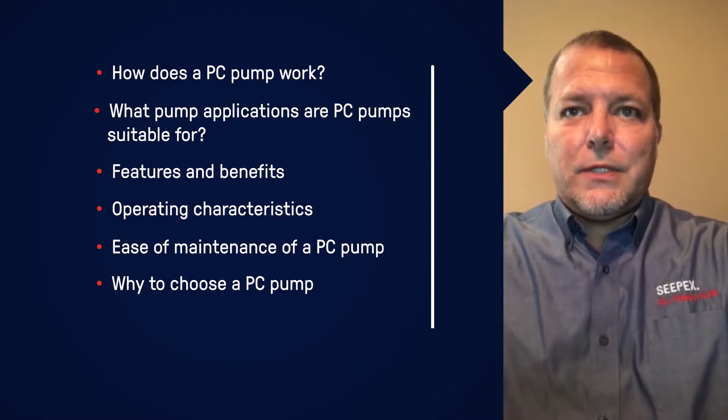Hello, my name is Chris Brooks. I'm a territory sales manager for Seepex. I cover Georgia, Florida, Tennessee, North and South Carolina for the company. I've been associated with Seepex now for about 19 years, primarily in the sales role. I've got about 30 years experience in the pump industry overall.

Today we're going to talk about progressive cavity pumps, or commonly referred to as PC pumps. A lot of good features and benefits from using a PC pump. And so we're going to talk about how they work, some of the applications you may see in water and wastewater, and then just some of the individual components and benefits.

So what is a PC pump? How does it work? So it's a positive displacement pump. It actually is comprised of a pumping element that has two main components, a rotor and a stator. The rotor is the rotating portion of the pumping element. It's typically made out of a steel or a metal material. The stator is actually an elastomer. It's the stationary portion. It's made from elastomer, typically like a Buna or EPDM or Viton.

Those two components go together. They actually form a cavity, and as the pump rotates, the cavity spirals from one end of the pumping element to the other. So you can say that cavity forms. As the pump rotates, it spirals. It actually progresses down the length of the pumping element, which is why it's called a progressive cavity pump.

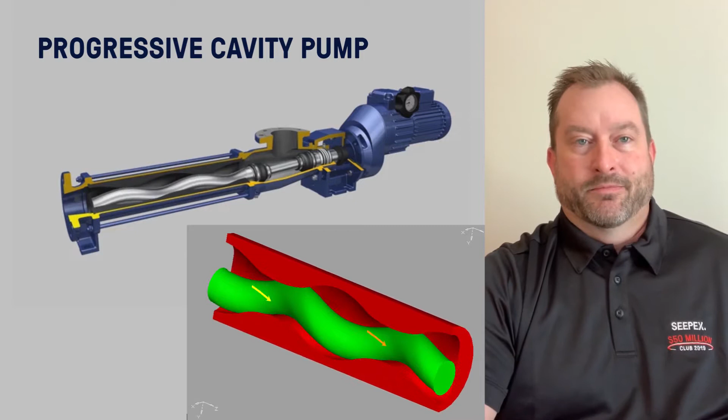Really, why are PC pumps used, or where are they used in water and wastewater? The two primary areas are chemical addition or chemical metering, and then sludge handling. There's not a lot of pumps available in the market today that can handle a wide range of products like that. So you can consider we do a lot of polymers, sodium hypochlorite or bleach, sodium hydroxide, caustic soda.

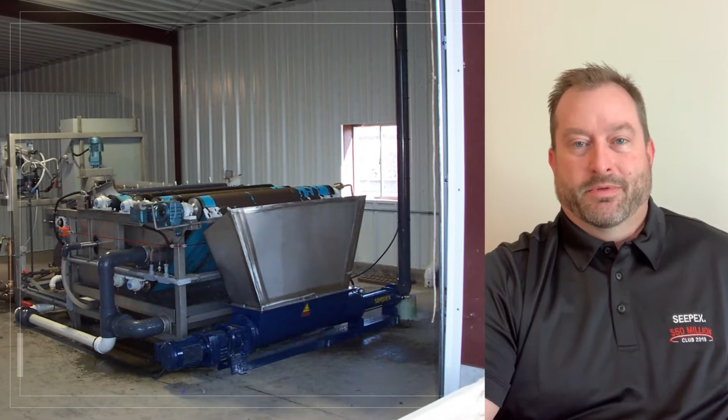So we do a lot of these thin metering chemicals, and then we also turn around and we do dewatered sludges, cake coming off a belt press that could be 45% dry solid. So it's a pretty unique pump, and it can handle such a wide range of material like that.

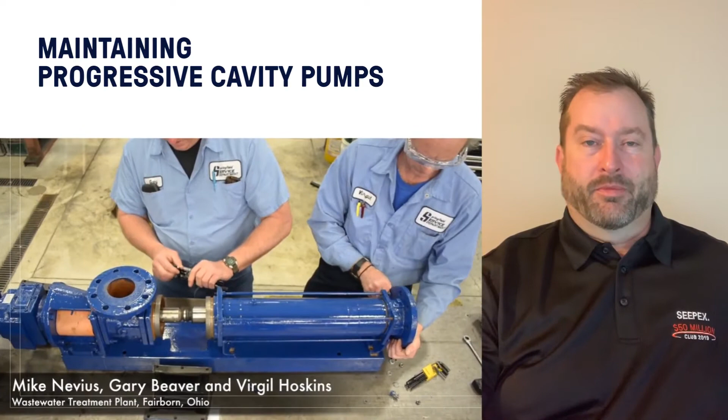Okay, the next area we want to talk about is maintaining progressive cavity pumps. A lot of people want to know, are these pumps difficult to repair in the field? They can be. Some of the larger pumps have extremely long stators, so they can be pretty heavy. Also, you have to allow for enough room on the discharge side of the pump to remove that stator off the end of the rotor.

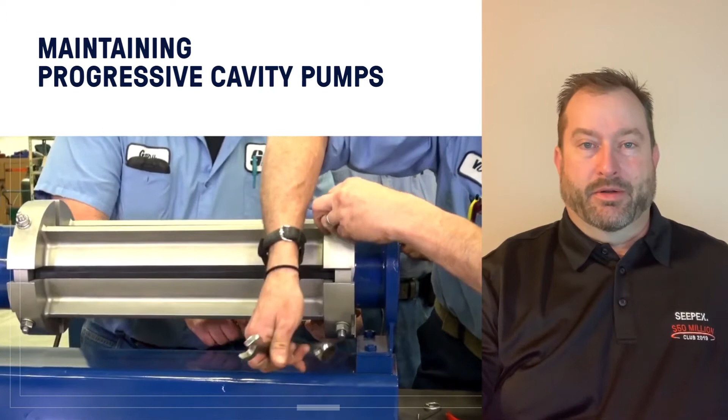Many PC pump manufacturers now have a type of maintain in place component to their pumps. And this means you can actually go in, change the stator, sometimes the rotor or other components, without having to remove any piping whatsoever. That seems to be pretty common among most of the major manufacturers now.

The maintain in place actually speeds up the maintenance time. So to change the stator, the times to do that are greatly reduced compared to a conventional stator. Because you don't have to remove any piping and have a spool piece on the discharge, the floor space requirement's much less with the maintain in place designs.

Some of the designs also include an adjustment on the fly. So basically you could go back, retension the compression between the rotor and stator as the stator begins to wear. So instead of having to run until you see a performance drop off, change the stator, you actually, when you see that performance change, go in and retension that compression and the pump's back to like new condition.

What are the benefits of using a progressive cavity pump? Why would you use it instead of other technologies? One of the main concepts is the compression or the interference fit between the rotor and stator. This limits the slip or the product going from discharge, the high pressure side, back to suction. So it's a very efficient design. It actually is very repeatable and accurate.

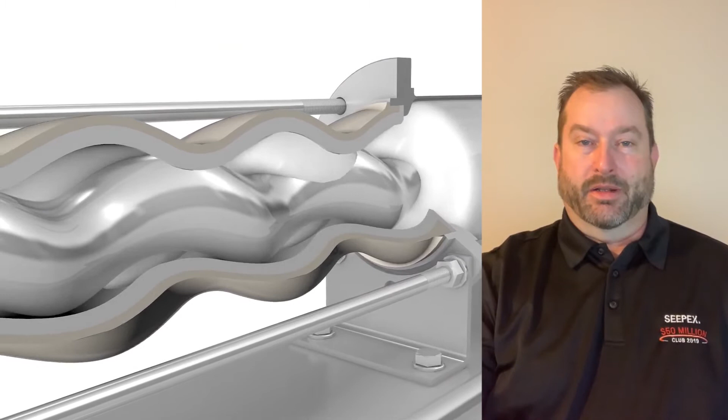So we trap that liquid in the cavity, and once that cavity is full, we know what that volume is. So as the pump rotates, we're going to get a known volume per revolution. So by doing that, we can be very accurate in metering. We can also just by changing the speed of the pump, change the flow rate, even at very low increments.

The PC pump is also a very low shear device. It doesn't put a lot of shear into the product, so liquids like polymer are very easily handled by a PC pump. Also, if you had a product that had solids that were brittle and you didn't want to break up, like yogurt with berries, for example, you could actually pump that without doing any damage to the berries. The pump can handle large solids. Some of the designs can handle solids as large as 4-inch.

The pump can be self-priming. So if you had a below grade tank and you needed to pull liquid from below ground up into the pump, you could do that with a progressive cavity pump. They have very low net positive suction head requirements. So if you had a tank that had a very low level or a long section of suction line, you can actually use these pumps in those applications.

We do single and multi-stage, so you can actually get very high pressures out of these pumps. They can also operate on very thin liquids as well as very high viscosity liquids. We pump everything from water or alcohol, which is very thin, up to dewatered sludge cake.

Pumps can also operate in either direction. So the normal suction is coming in at a 90-degree angle to the pump. The discharge is out the end. We can actually reverse rotation to where the suction is coming in the straight component. A lot of times if we're pulling a suction lift, we will actually run the pump in that direction so the seal or packing is not in the suction casing. We can pull higher lifts in that configuration.

So what are the typical operating parameters on the progressive cavity pump? The pumps have the ability to go from extremely low flow rates, like for metering or dosing small amounts of chemical, down into the fraction of a gallon an hour range, all the way up over 2,000 gallons per minute. These pumps are commonly used on metering, where it's literally drops of fluid, and all the way up to large flow rates, up into the thousands of gallons a minute range.

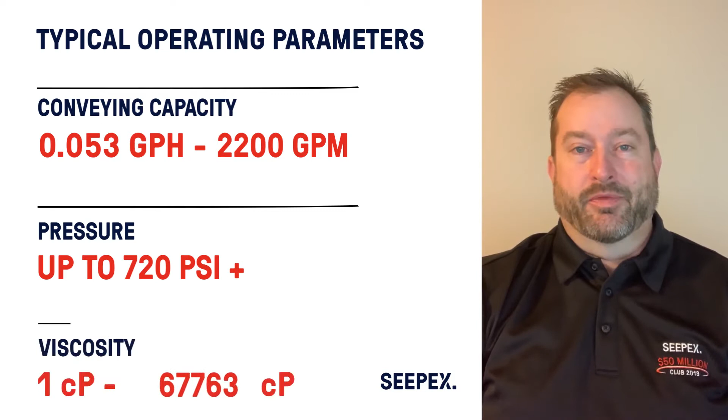The pumps can also operate in a wide range of pressures, anywhere from 1 psi all the way up to over 700 psi. Viscosities, we can handle any kind of fluids from alcohol, water-like fluids, all the way up to dewatered sludge cakes, which can be over 1 million centipoise.

The pump has the ability to operate in low temperatures down to like -4 degrees Fahrenheit, all the way up to about 350 degrees Fahrenheit. Our limitations on the temperature are the elastomers we use in the stator. Solids, these pumps have the ability to handle extremely large solids.

We handle a lot of fluids that have a large percentage of solids but are very small, all the way up to products that have large, in some cases over 3 to 4 inch size solids. The pump can also handle a mixture of air or gas and liquid as well as solids. So they're pretty unique in that they can handle not just liquid, but a mixture of those as well. We can also handle a large percentage of solids, all the way up to about 45% dry solids, which is like a dewatered cake in the wastewater industry.

So what kind of flexibility do we have on the installation of these pumps? As we mentioned earlier, the pump can be rotated in either direction. So you can actually change the position of the suction and discharge on the pump if required. A lot of the pumps use a direct coupled method, so there's no belts, no couplings between the motor, gearbox, and pump. That eliminates any kind of alignment issues.

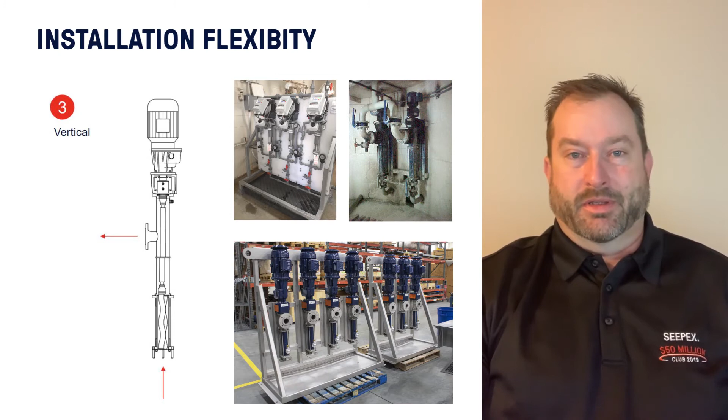The pump really doesn't care which position it's mounted in. It's pretty common for PC pump manufacturers to mount these pumps horizontally as a standard, but you also see a lot of these pumps mounted in the vertical configuration as well. On most pumps, the suction flange is at a 90-degree angle to the pump. That can typically be rotated in 90-degree increments, so that position can be changed as well. So again, the pumps are self-priming, so a lot of times you'll see these pumps pulling a high suction lift.

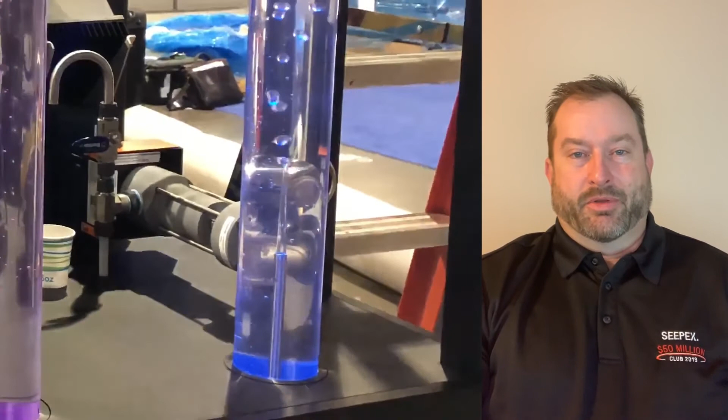Another application these pumps are used for is metering. They're very low pulsation and very accurate. So when using these pumps on metering, you can actually eliminate the need for a pulsation dampener like a lot of the other competitors need on metering. The pump doesn't use any kind of check valves. It actually acts as a valve itself, since there is a compression between the rotor and stator. As the cavity between the rotor and stator progresses out the length of the pump, as one cavity stops, another one's forming. And so it's almost an uninterrupted flow, so you see very minimal pulsations.

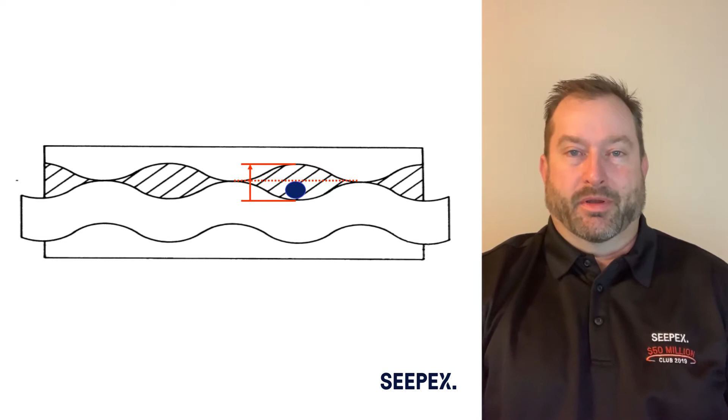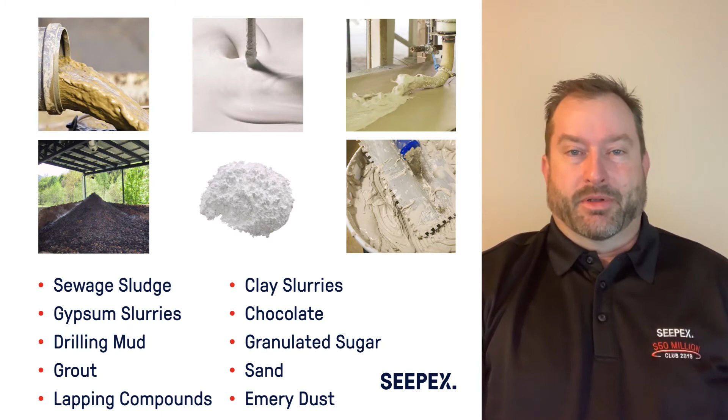Again, the pump can handle large solids, as we mentioned, as high as 4 inches on some of the larger pumps. And because of the way the cavity is formed, when those solids are trapped in the cavity, you see very little damage from the pump. The pumps are used quite often on abrasive fluids. We pump everything from calcium carbonate slurry to lime slurry, products that have quite a bit of solids in them. There are no restrictions once the product gets into the cavity. A lot of pumps have a check valve or some other restrictive device in the pump. The PC pump doesn't have anything. Once the product enters, the cavity stays the same shape from suction to discharge.

We do limit speed when we're handling abrasive solids, just to try to prolong the life of the rotor and stator. Another method to reduce the abrasive wear on the pump is to try to limit the slip. So a lot of times we'll do that by either reducing the discharge pressure on the pump or adding stages to the pump so we reduce that slip.

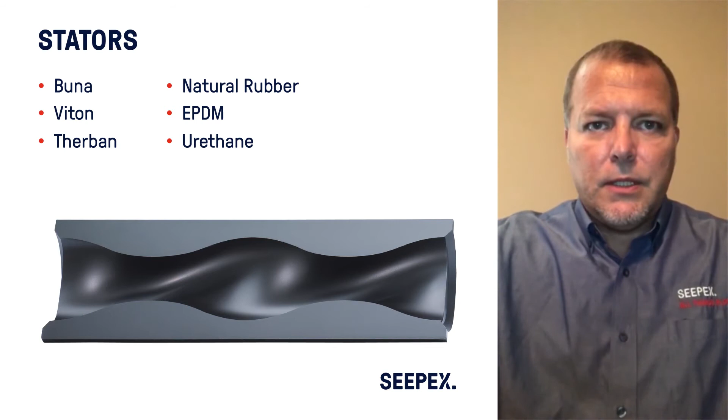Thank you, Chris. Not all stators and rotors are created equal. Let's take a look at stators first. Oftentimes, I've had to rely on our in-house lab to create new stator compounds. The stator is the sacrificial part of a PC pump, generally wearing out 2 to 3 stators to every rotor. Buna, Viton, Therban, natural rubber, EPDM, and urethane are some of the compounds that you'll find with PC pump companies. The reason for so many compounds is that there are a variety of operating conditions that can impact the stator, so selection is absolutely critical for success.

Chemistry. Aggressive chemicals can cause an improperly selected elastomer to swell, shrink, harden, or disintegrate entirely. When dealing with aggressive chemistry, be careful to select a compatible elastomer. Temperature. High temperature will cause swelling and failure of the elastomer, stalling of the pump, or damage to electric motors from the increase in compression resulting in high torque. For high temperature conditions, consider an even wall or even a split elastomer design that can allow for expansion. Some PC pump companies have special certifications such as FDA, 3A, even NSF for drinking water. Ask your PC pump company for options.

Next, I'd like to introduce my colleague Chris Oakes, who would like to explain more about the characteristics of the progressing cavity pump. Chris?

Hello, my name is Chris Oakes. I am the Applications Engineering Manager at Seepex and have been with the company for 7 years. The municipal market has been my primary focus during my time with the company, but I've also been involved in various other industries including food, oil and gas, mining, and general industrial applications.

We would like to share some information with you regarding how a PC pump works, specifically the topics of slip and intake efficiency. From there, we'll move on to discuss drivetrain components and power transmission in a PC pump. So what is slip? Slip is the reverse flow of fluid in a pump and is caused by three main factors: discharge pressure, fluid viscosity, and fit.

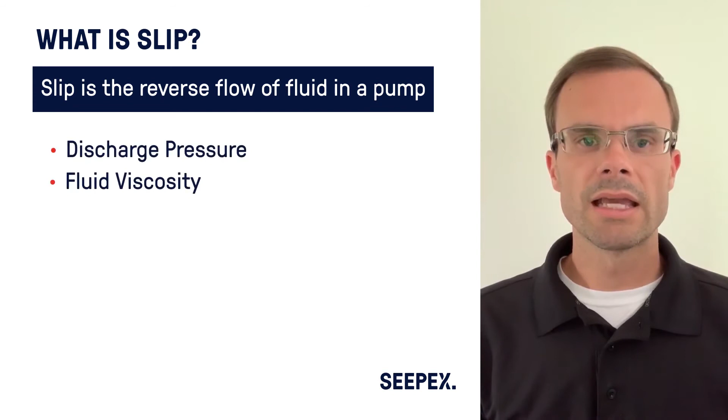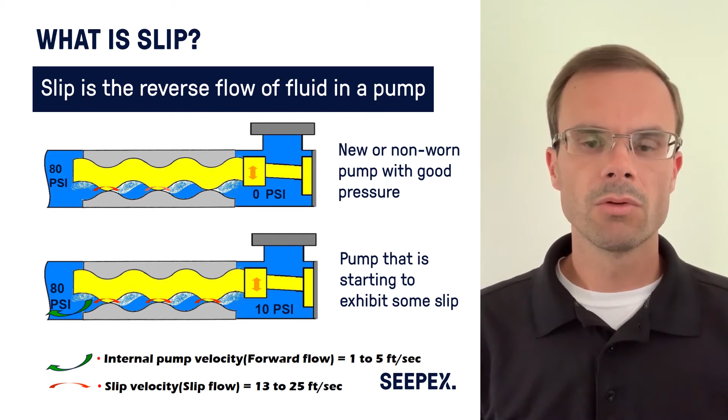So as discharge or differential pressure in a PC pump increases, slip also increases. As fluid viscosity increases, slip decreases. And as fit or compression between the rotor and stator is reduced due to wear, slip also increases. From the factory, the amount of compression between the rotor and stator has been optimized. So regardless of the source of slip, we must overcome slip to have positive flow.

Slip can be detrimental for a couple of reasons. First, slip can cause accelerated wear to the rotor and stator for abrasive fluids. Second, slip actually shears the fluid, which could cause damage to the product. So how do we reduce, eliminate, or compensate for slip? Well, first and foremost, a proper pump selection is key. Our goal is to optimize the pump and its components to meet the application requirements.

It should be noted that slip is typically not an all or nothing situation. Some slip is okay in most situations. The most basic way to compensate for slip is to increase pump speed. By increasing pump speed, we overcome the slip and achieve the desired flow. This is actually the case for most pumps that we sell, and is completely acceptable.

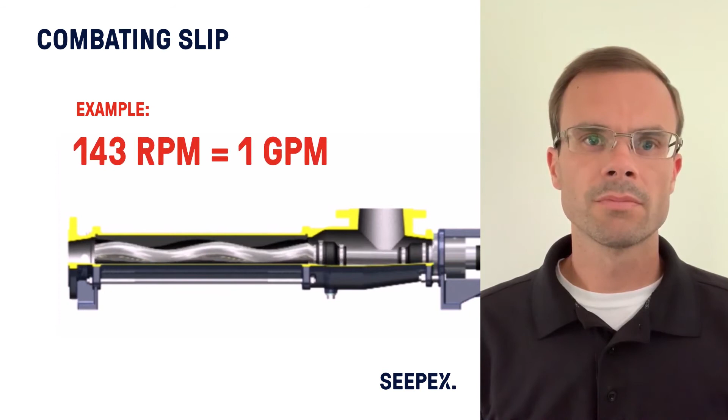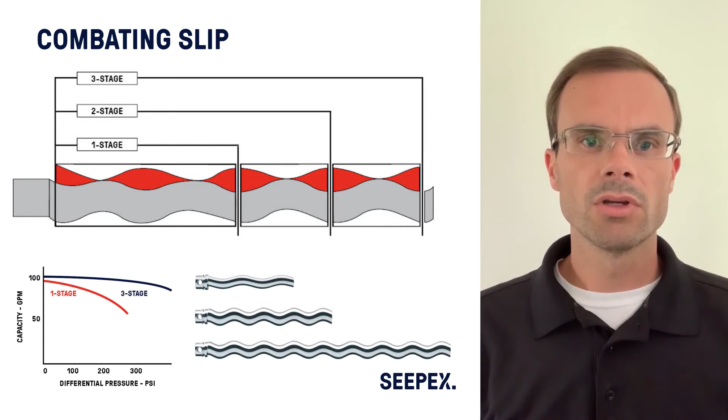In situations where we want to reduce the amount of slip in the pump, we often add stages. For example, a single stage pump is rated for 6 bar or approximately 90 psi. If our application requires 80 psi, the single stage is capable, but there may be more slip than desired. So by using a 2, 3, or even a 4-stage pump for this application, we can reduce and nearly eliminate the slip. Eliminating slip and adding these stages will also extend the service life of the pump.

Another method for controlling slip is to adjust the compression fit between the rotor and stator. This is less common, but it is advantageous in some situations. Reducing slip allows tighter control for metering and dosing applications.

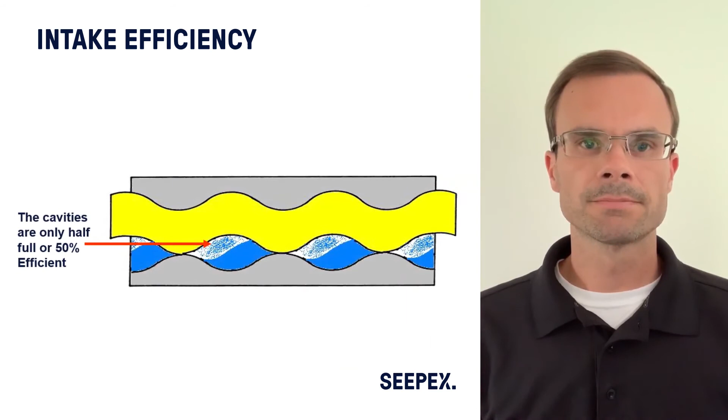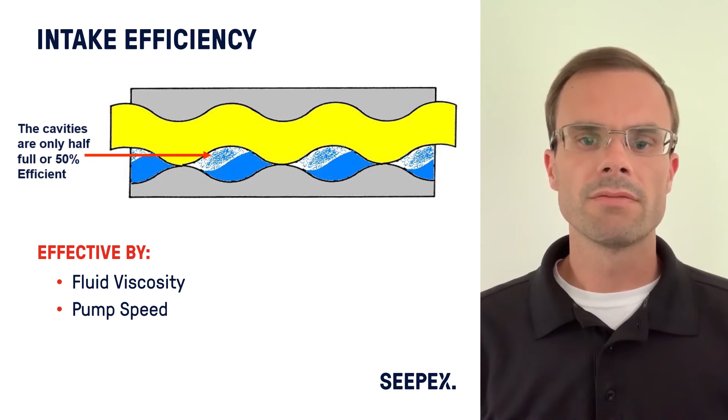So we should now discuss intake efficiency, sometimes referred to as volumetric efficiency. This is simply a measure of how well the product flows into the pump and fills the cavities. Intake efficiency is affected by fluid viscosity and the pump speed. The thicker the product, the more difficult it is for the product to flow into the pump. Likewise, the faster the pump runs, the lower the intake efficiency.

So previously we mentioned that higher viscosity reduces slip. So there's a balance between reducing or eliminating slip and having high enough intake efficiency to actually convey the product. The first method of increasing intake efficiency is to run the pump slower. This means a pump for something like peanut butter will be larger and run slower than a pump for water or other very thin fluid in order to produce the same amount of flow.

If the product is very, very thick, we may never reach 100% intake efficiency, and that's okay. In most situations, we can size the pump with some intake efficiency less than 100% and compensate by simply increasing the speed of the pump. Running a little faster allows us to achieve the desired flow. For applications such as a basic transfer of material, we can get away with lower intake efficiencies because they are not nearly as critical as metering or dosing applications.

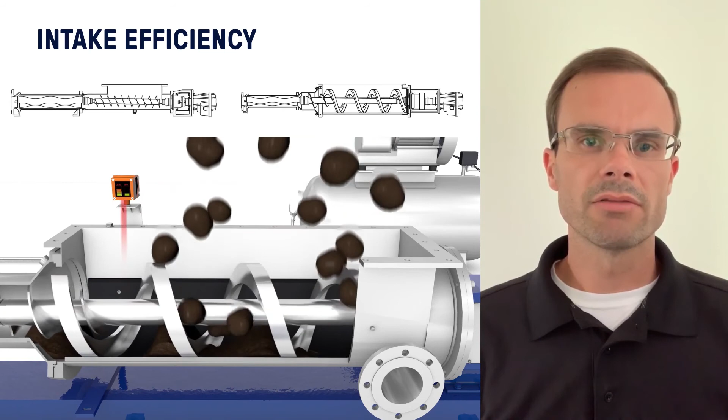For these applications, we want to ensure very high intake efficiency such that we have very accurate and repeatable flow rates. Another way to increase the intake efficiency is to force feed the product into the pump. What does this mean? We do this by using an auger in a hopper style pump that pushes the material into the cavities. These augers have a pitch that actually overfeeds the pump, the goal being to completely fill the cavity. Another benefit of this auger, specifically for thixotropic or shear thinning fluids, is that the fluid is sheared enough to effectively reduce its apparent viscosity, making it even easier to get the product into the pump.

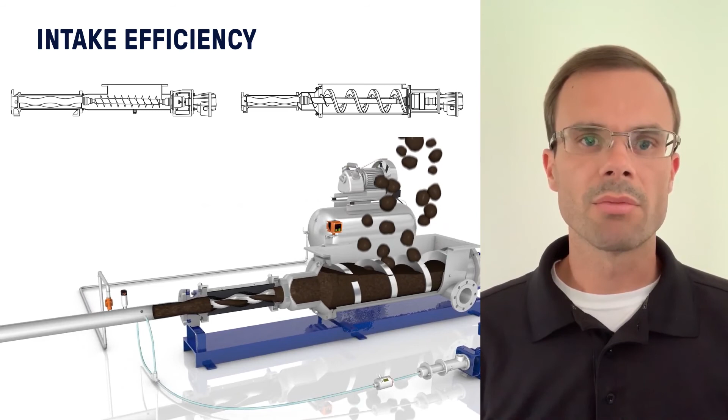So in summary, we should take special considerations for viscous fluids, but we do have ways of properly handling them. Next, we will move on to the drivetrain and power transmission of a PC pump. The drivetrain typically consists of a motor, gearbox, drive shaft, connecting or coupling rod, universal joints, and the rotor. The challenge in a PC pump is the rotor head rotates eccentrically, while the motor or gearbox shaft rotates concentrically. This means we need some type of universal joints to transmit the torque required to turn the pump.

The closed pin joint is the most common universal joint type used due to its simple design and serviceability. It includes an elastomeric cover that seals and separates the fluid from the universal joint lubricant, which is typically a grease or an oil. Pin joints may or may not include bushings, which allow for rebuilding of the joints rather than complete component replacement. Also, proper material selection of the pins and bushings is critical for a long service life.

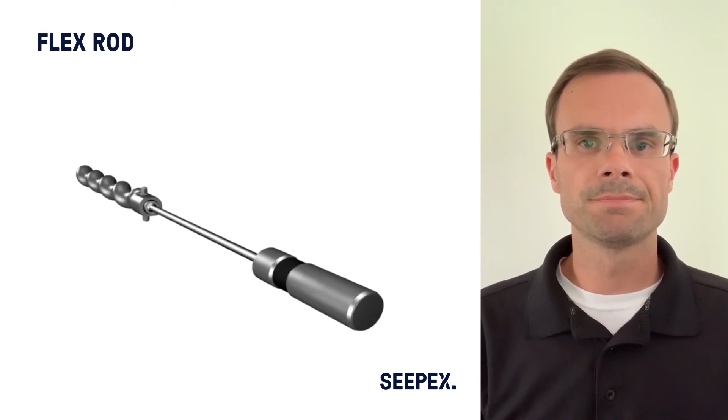The next type of universal joint in a PC pump is an open pin joint. The open joint is not covered by an elastomeric sleeve and relies solely on the conveyed product to lubricate its components. This is most common in the food industry, such that the pump can be properly cleaned and sanitized. Also used for sanitary applications is the flexible connecting rod made of titanium. This design actually eliminates the universal joints altogether and relies on the flexibility of the shaft to convert concentric motion to eccentric motion. The advantage is that all moving parts are eliminated, but there are limits for speed and pressure. Also, the pump typically is longer to minimize the angularity of the flexible connecting rod.

When pumps become very large in terms of flow and/or pressure, the cardan type joint is used. This would be similar to that of a large truck drive shaft that has a dual pin design. Gear joints are also used by some manufacturers, but are much more complicated than pin joints in terms of assembly and serviceability.

Finally, we will discuss common PC pump drive arrangements, typically consisting of a motor and gearbox. The block or close coupled design is the most common, lowest cost, most compact, and easiest to assemble. The block pump components are all designed such that they easily bolt together and do not require any alignment in the field. In the block design, the gearbox output shaft bearings act as the pump bearings, so they must be sized accordingly.

If the gearbox cannot be designed to handle the service conditions, a long coupled pump may be required. The long coupled pump includes an integral bearing frame that is capable of handling the pump's full capacity. This design does require an external coupling and increases the pump length, typically by 1 to 2 feet. It goes without saying the long coupled design is more expensive than the block pump, but may be warranted in certain situations.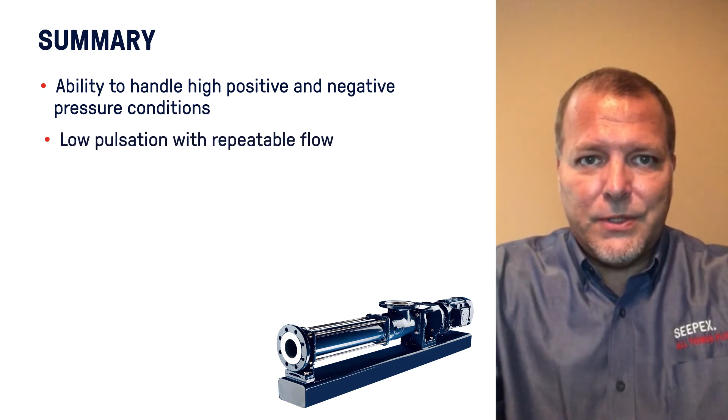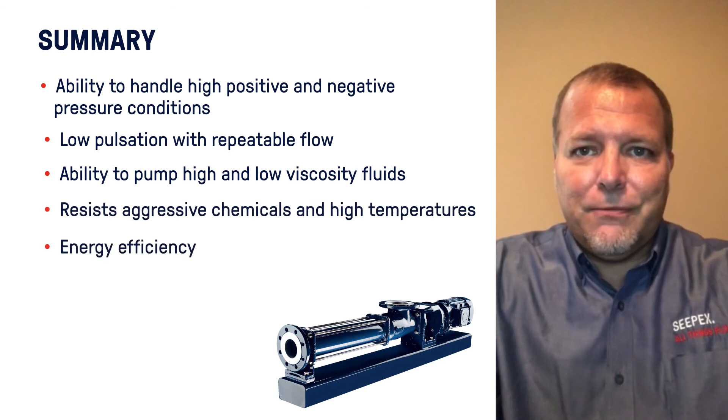Thank you, Chris, and thank you all for joining us today. We hope that this short presentation has given you a better understanding of PC pumps. With the ability to handle a combination of high positive and negative pressure conditions, the low pulsation and repeatable flow which saves money on chemical usage, high and low viscosity fluids are easily pumped, resisting aggressive chemistry and high temperatures, all of this while being extremely energy efficient, having less downtime, yet easy to repair when necessary. We believe this to be your best pump solution on the market today.